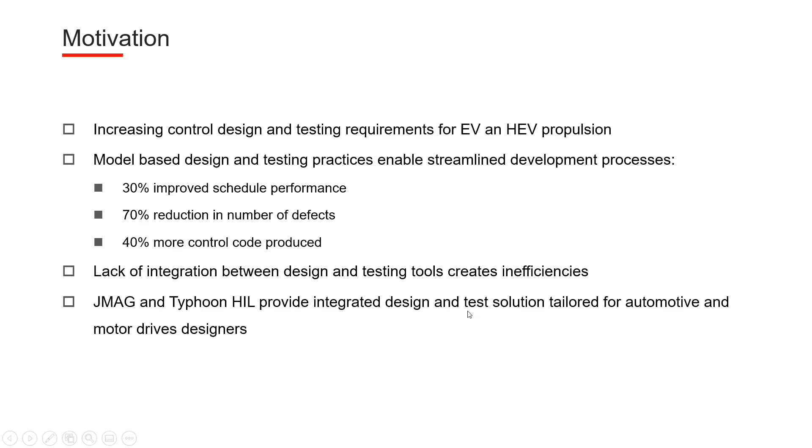Taking a little bit further and basically looking at the V cycle, which is the development cycle of EV motor drives, we can achieve reliable design right from the initial stages. So there are two phases, design and testing phase, wherein the combination test can be started as early as right after motor design. Basically, to be more specific, what we can do is we can test machine and control together at an early stage by integrating high fidelity models.

This way, what we can achieve is shorter and faster development cycles. So with this, what we are going to present today is a solution which is a better way to design and test motor drive control. What we are presenting here is a solution which involves JMAG and Typhoon HIL integration.

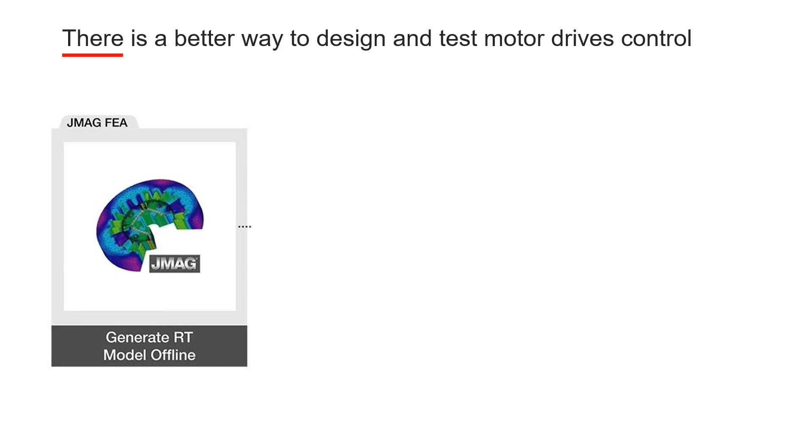So we are going to cover something about JMAG, how you create these high fidelity models, as you can see on my screen. Just to give you a framework, the screen shows how an FEM model can be converted to a lookup table based model, and then how we can integrate that with the Typhoon HIL solution to provide an integrated solution for achieving all the motivation points I have covered.

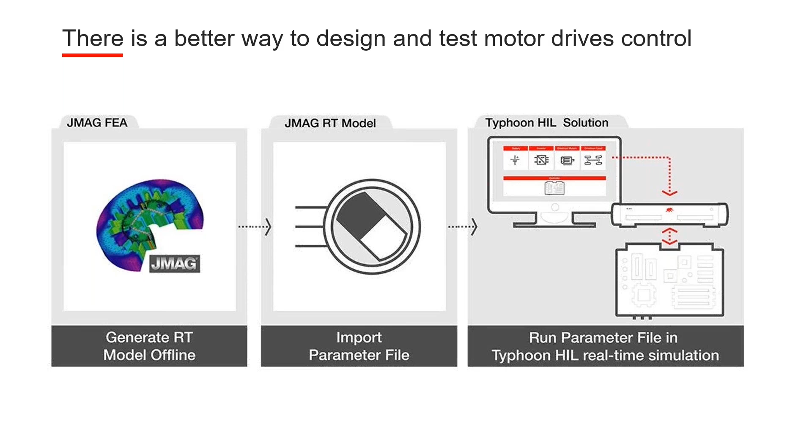All right, moving on to the next slide. Starting with JMAG-RT. We will give a brief introduction and set the pace for the next talk and also the demonstration. So we'll quickly look at what JMAG-RT is. JMAG-RT is basically a tool that generates high fidelity plant models for system level simulation and real-time simulation.

Now, when I say high fidelity model, it basically captures the comprehensive motor characteristics that can be extracted from an FEA model. To be more specific, we can take into account nonlinear effects, saturation effects, and space harmonics. JMAG-RT is used to develop this 1D model, which is basically a lookup table that can be used in hardware-in-the-loop simulations, which can connect a physical ECU to a virtual motor.

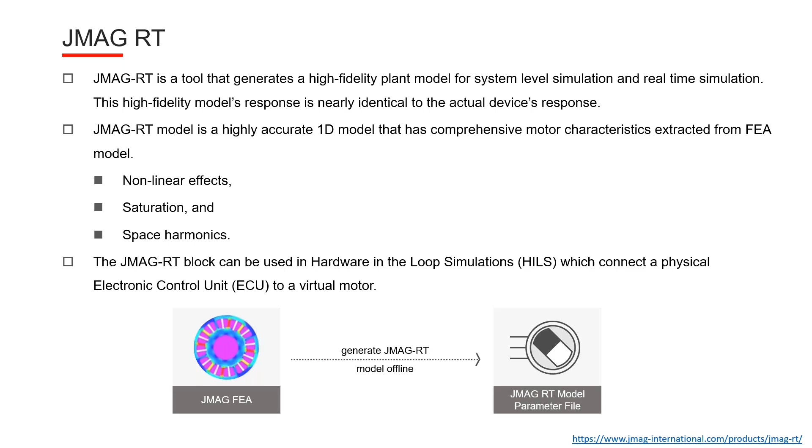Then you have JMAG Designer, which is a full-fledged electromagnetic FEA analysis tool from which you can generate a JMAG-RT model. If you have your test data or measurement data, you can also input a CSV file to develop this lookup table. And also on our website, we have commonly used motor models, called the motor model library. You can download it from there as well.

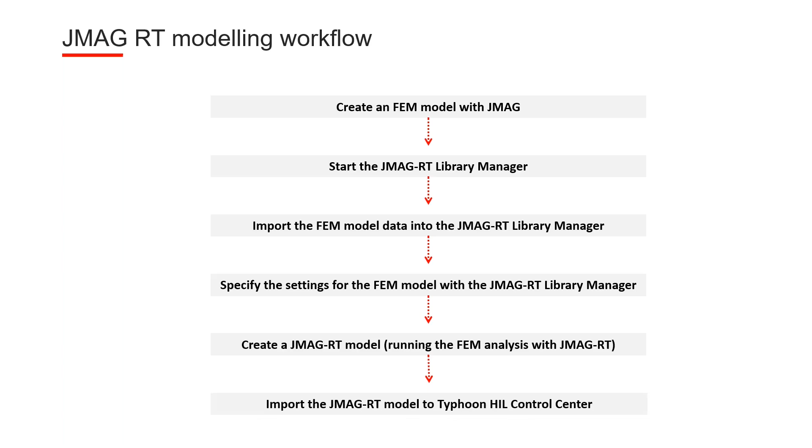Now, the JMAG-RT modeling workflow involves us first creating an FEM model with JMAG. In the second stage, we start the JMAG-RT library manager. Of course, I'm just talking about the workflow and the framework, but later we will also go over the demonstration. In the JMAG-RT library manager, we import the FEM model, and then we specify some of the settings that are required, basically current angle and current amplitude inputs. Once we run this RT model, it outputs an RTT file that can be transferred to Typhoon HIL Control Center.

Now, from here, I will pass it on to my friend Peter, and he will talk about what he's going to do with this RTT file, the high fidelity plant lookup table that I'm providing to Typhoon.

Okay, thank you. Let me just quickly share my screen. Just a second. Okay, Boris, please let me know if you see the slide now. Yep, everything is perfect. Okay, great, thank you.

So from here, what we want to enable for users is to seamlessly import the JMAG-RT generated models into Typhoon Hardware-in-the-Loop simulators. The idea is for the user just to take the RT file, load it into the model, and be done with it, without any further modifications to the RT file.

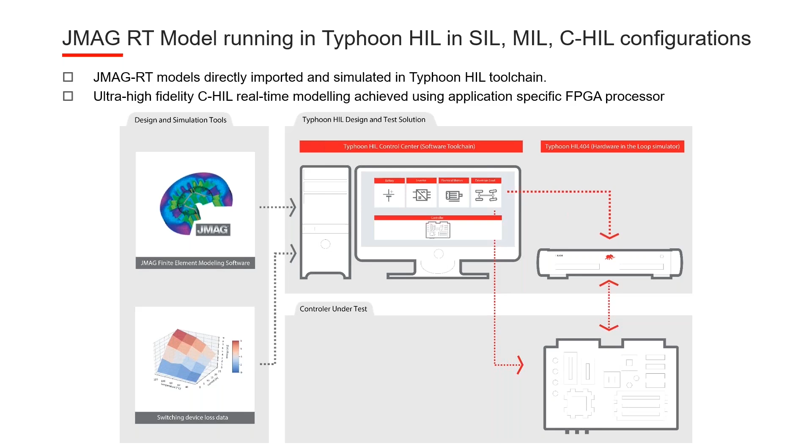And what's nice about this is that we can also run pre-made batches of tests every time we make a new change to the controller, and we can basically be safe when moving on to the real prototype. So any changes made can be tested right away on the simulator, and if we missed anything, we can go back to debugging and so on. And from the project schedule point of view, we can start testing the controller without the actual power stage prototype, and we can completely automate the testing process.

So I'll just quickly give an overview of the Typhoon HIL emulators. So basically they are built for power electronics drives and testing, and they use very application specific processors. It's been on the market for more than 10 years now, and it's continuously improved and expanded upon. So it really focuses on power electronics and power system applications.

The FPGA solver that solves the circuit can run with simulation time steps as low as 200 nanoseconds, which gives us a great resolution. And in addition to that, we also have sampling of digital inputs of 3.5 nanoseconds in order to support simulations of converters that work with high switching frequencies. The design of the simulators is modular, so the time step of the simulation is not a function of the model size. We can just connect new devices to the already existing system and increase the model size. And Typhoon also offers built-in test automation capabilities.

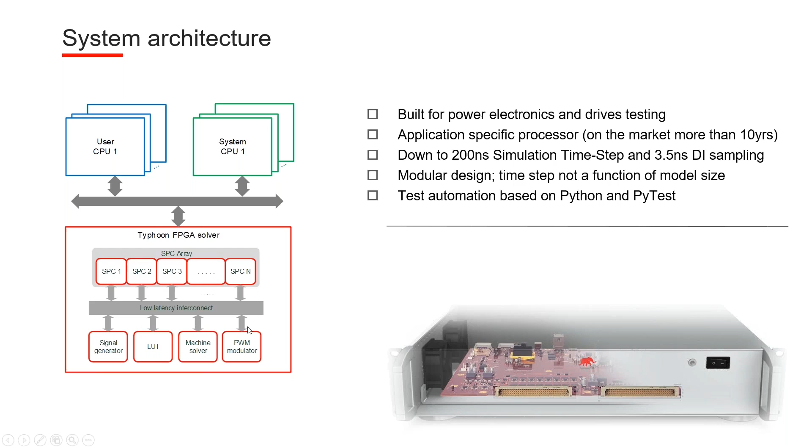And I'll spend a little bit more time talking about the machine solver, because we're doing a demo in motor drives. So basically, the machine solver is a part of the FPGA processor. It supports multiple machine types, and we'll see that in the Typhoon schematic editor library. We have support for the direct import of JMAG-RT models. The solver runs synchronously with the circuit model, meaning that all the machine models also run at the same very low time steps as the rest of the circuit.

And we have built-in position and speed feedbacks for the machine models that can be sent to the controller. So incremental encoder, sine encoder, resolver, and protocol-based interfaces. At the moment, the nonlinear models include only saturation of fluxes as functions of currents, but in the near future, we want to expand this and add support for spatially varying machine models.

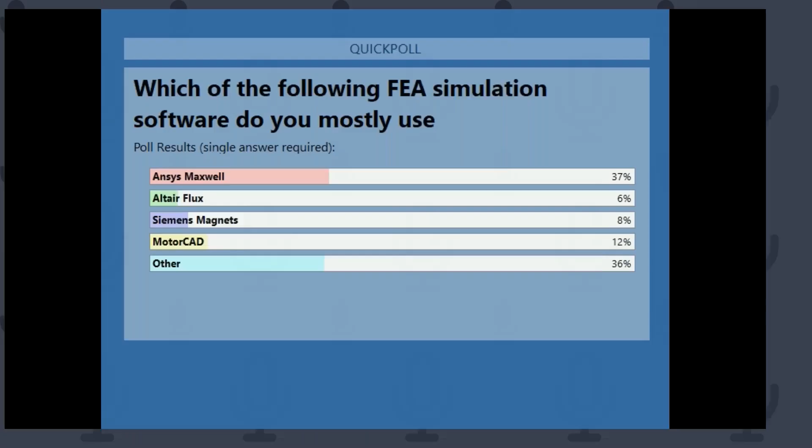Okay, so with that being said, these are the results of the poll. So we see a lot of people using ANSYS Maxwell. And I guess that's the perfect introduction to pass the talking stick over to Ved. So Ved, I'm gonna make you the presenter, and if you would like, you can take us into the demo sections.

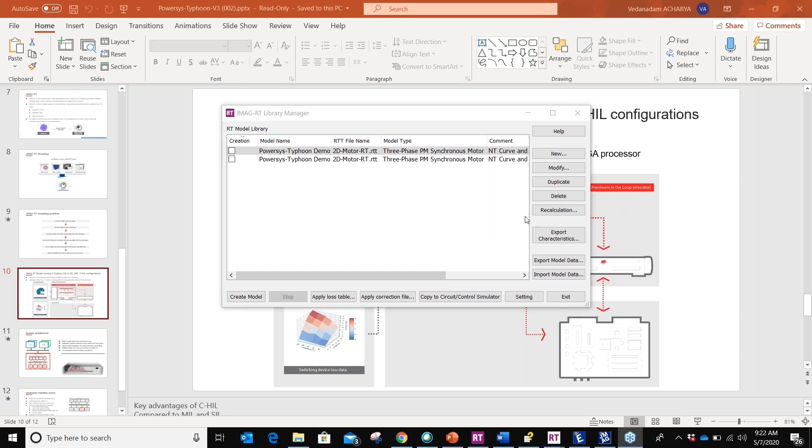All right, thank you, Boris. Let me share my screen again. All right, Boris, if you can confirm, you can see my screen? Yes, we can. Perfect. All right. Thank you, Boris, again, and thank you, Peter, for the presentation.

Now we are going to look at the demonstration of what we were actually setting up the framework for initially. So first thing, as we all know, is to look at JMAG-RT. How do we create this high fidelity lookup table? As we have seen some of the steps initially, we will just follow the same flow chart and try to generate an RTT file and pass it on to Peter, who will show us further how he will integrate that to Typhoon. So here we see the first and foremost thing is for us to create an FEM model.

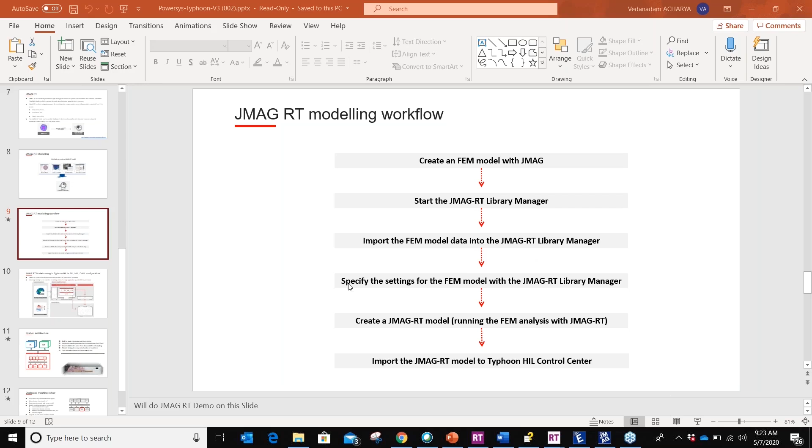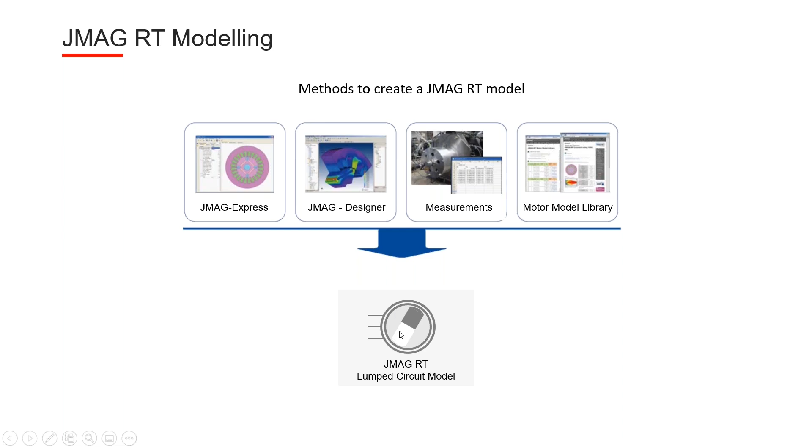So for that, as I said, there are 4 ways of doing it. Either you can do it by JMAG Express or JMAG Designer or measurements, or you can also download the model from Motor Model Library. So today we'll see the case where we are actually creating an FEM model in JMAG Designer and then we will create an RT file from there. So I will switch from my presentation to JMAG.

So first of all, quickly looking at the website, jmaginternational.com, if you go to technical library and application catalog, you do have a bunch of examples on there for any of your EM design or any of the motor models that can be downloaded. Provided you have a trial license, you can also download, open it on your end and test it for yourself.

And if you want to learn more about JMAG-RT as well, on our website under products, you can go and look at JMAG-RT. And it will also give you access to the motor model libraries where you can download and also look at different examples on there.

All right, so the first way of creating JMAG-RT, as I said, is using a template-based tool, which is JMAG Express. You can see there are a bunch of templates of different motor models. You can pick and choose any design from the commonly used templates on here, or you can also build a combination of your own rotor and stator model by picking from the most commonly used designs there. All right, this is one way.

And then once I pick any of the motor models, it will give me an opportunity to put in the parameters required, either by requirements, if I know my requirements, it could be rated power, rated torque, or speed and max current and things like that. Or if I know detailed dimensions, material data, winding, and drive conditions of the particular motor, I can also do that as well. And then once I have this, there is a tab where you can directly click to create the JMAG-RT model. This is one of the ways.

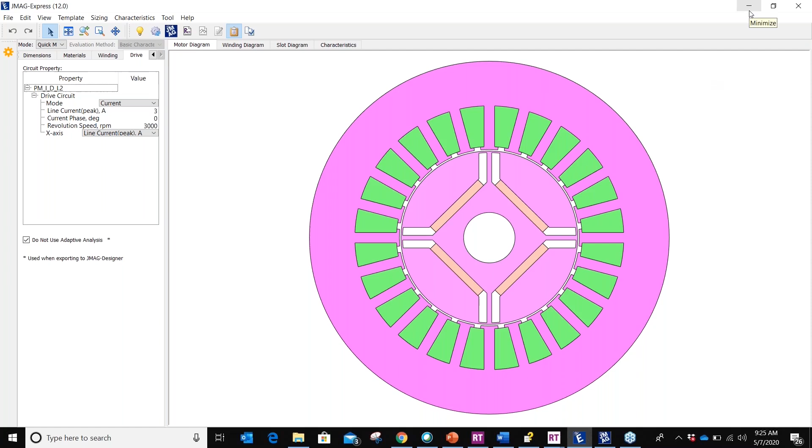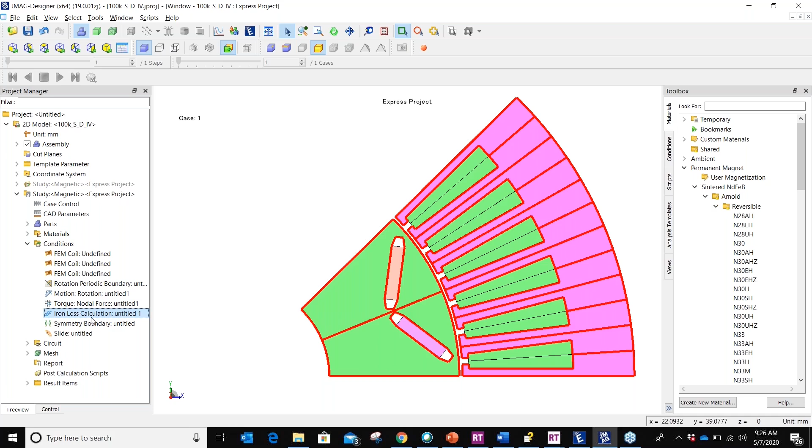So basically the first step is to create your FEA model, which you can do by Express. Or the other way we are going to look at today is by using JMAG Designer, which is a full-fledged FEA tool. Now, in this, as you can see, I have a 2D model here, and I have my study created with all the parameters set up. So I define my materials, I define my conditions. Under these conditions, I also have loss setting. Basically, I am trying to take iron losses into account as well while I create my RT file.

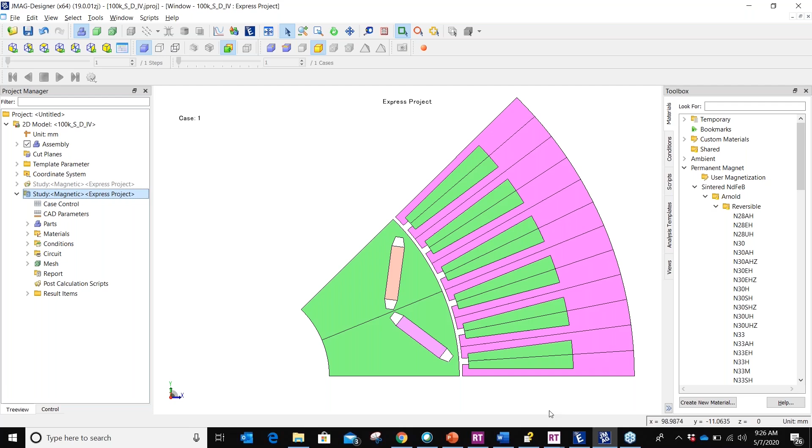That is the reason I also have the loss condition set up. And then I also mesh the model. Here we go, I can quickly show you the meshing. And then further, I need to input this into JMAG RT. So for that, I will go ahead and open RT library.

This is called the library manager, wherein I can quickly click on new, and I can input different types of machine models, either a PMSM or a stepper motor, solenoids, induction machines, or if you are working with multi-phase machines, you can also use a generic model as well. So as a demonstration for today, we are going to go over creating a three-phase PMSM.

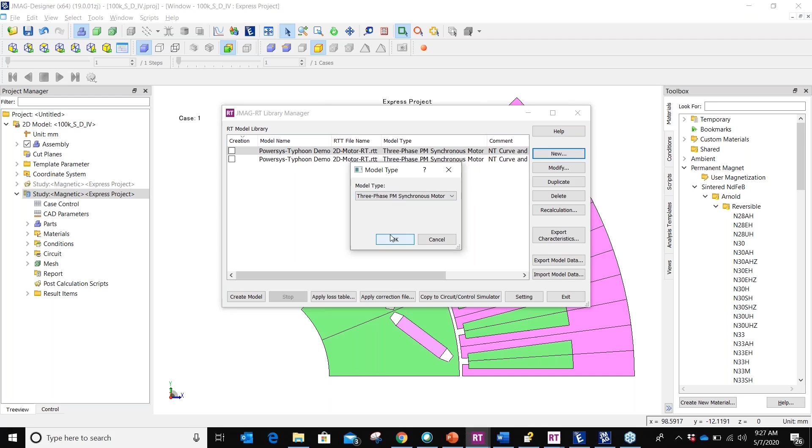Once I click OK, it will open up a window where I can select the fidelity that I want to be generating. So basically there are two types. One is an LdLq model and the other one is spatial harmonics. When I say LdLq model, the d and q axis inductances are dependent on current and phase angle, and the effects of slot harmonics are not accounted for due to the sinusoidal component of the EMF in this particular fidelity.

And the spatial harmonics model is a more accurate model because the inductances and torque are dependent on current and phase angle, and slot harmonics are accounted for, and the inductance can be obtained highly accurately even if the model has very high magnetic saturation, for example. So this can be done.

And the third option here, use user data, is basically when you have measurement data, you can input a CSV file of the measurement data here. I can show you an example of a CSV file and the data that can be imported for generating an RTT file from the measurement data.

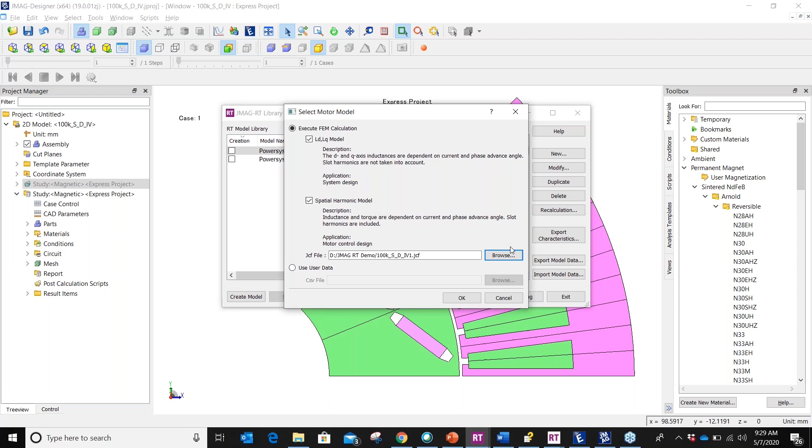All right, now for demonstration purposes, I can select both fidelities, and then I need to input my JCF file, which is the FEM model. I already saved a JCF file from the FEM model I created, so I will just input that and click OK. Once I click OK, it opens up a window where I can scroll through multiple tabs for the settings. Here I already have an example open, so I'll just walk you through that.

The first tab is the information tab. Basically, you can input basic information, and you can also look at the version, model type, and what kind of fidelity you have selected. Motor information, if you want to put a comment in there, and the resolution you're using to generate this RTT file. When you are transferring this RT file to your control designer, or anybody, you can pick and choose what data you want to publish or share. If your motor design parameters cannot be shared, you can just uncheck publish so that the data is safe on your end.

But in case you are willing to share the details, you can click on publish so that when the lookup table is created, you can also see the information of the motor in that file as well.

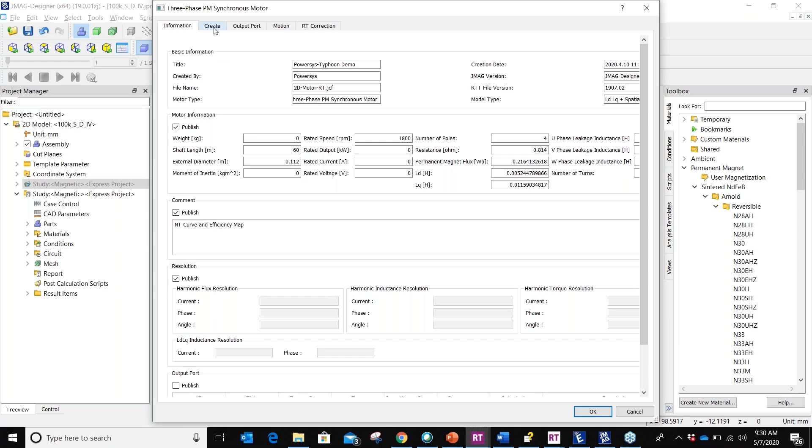Now, the most important tab is the create tab, where we define the resolution and different components to generate the RTT file. The first one shows me what kind of fidelity I've chosen, since I've chosen both LdLq and spatial harmonics. Here I can define the number of poles, and of course the configuration of the phases, UVW. Here I define the number of turns, which for this example is 35. The resistance I can define, this is the phase resistance, and of course the leakage inductance as well.

Now, moving on to the next one, where it says drive type or current harmonic. If it is driven by a sinusoidal wave, the option checked here is sine wave drive. Or if it is driven by other waveforms like square wave, you can check the other option. And here is where we define the settings for the current and phase angle. Basically, the number of operating points can be defined here.

Now, you can also use the auto setting. Basically, what auto setting does is it creates the data points that are set automatically. You can just enter the rated current, and once you enter the rated current, what JMAG does is it automatically creates 7 points, basically taking into account the rated current, and it will extend it to 3 times the rated current. Perfect.

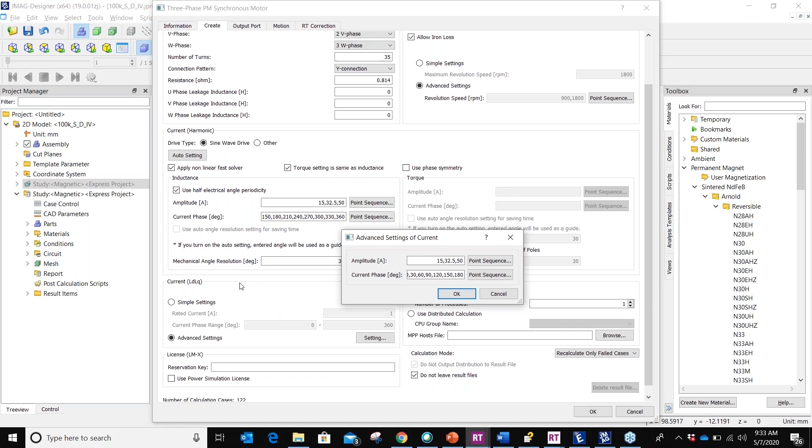In terms of Ld/Lq calculation, again, you can either go by simple settings, where you define your rated current, and JMAG automatically defines multiple points, or you can click on advanced settings and you can define your current and phase angle. Here, I kind of matched both the inductance calculation and the Ld/Lq calculation to have the same operating points. All right, and based on the operating points, mix and match, there is a number of cases that are defined. The number of calculations that will be run to generate the lookup table are shown here.

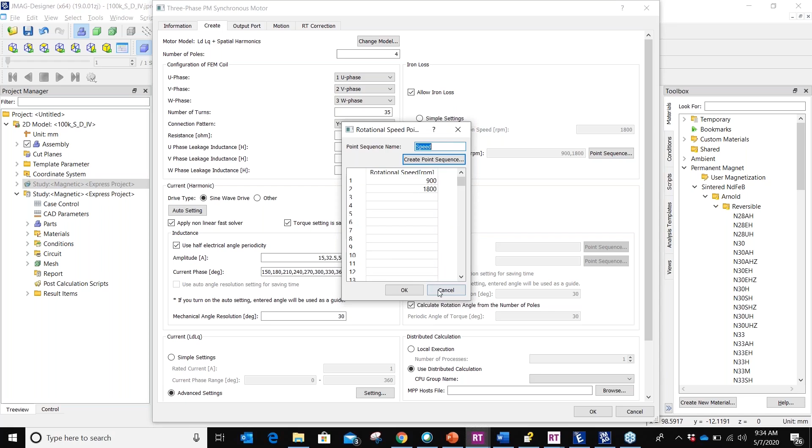Now, a couple of other things is if your model is taking into account the iron losses, you can always use this tab wherein you can define, hey, how do I want to calculate my iron losses? Again, simple settings. Or I want to choose a point sequence, I just use 2 speeds, and then further, since there are many calculations, you do have the options of basically parallelizing the calculations, provided you have the multi-core running capability. There are different licensing structures that you can use to basically move the simulation faster.

Okay, some of the other things is you can also define your mechanical angle resolution here. So by default it is set to 30, but obviously you will define it based on your model and based on the fineness of the resolution you would need. And when angle dependency for inductance in each phase has periodicity, in that case, you can use this half electric angle periodicity. Basically, what it does is the calculation time for generating the RT model will reduce if there is periodicity, and you can set the option to use periodicity.

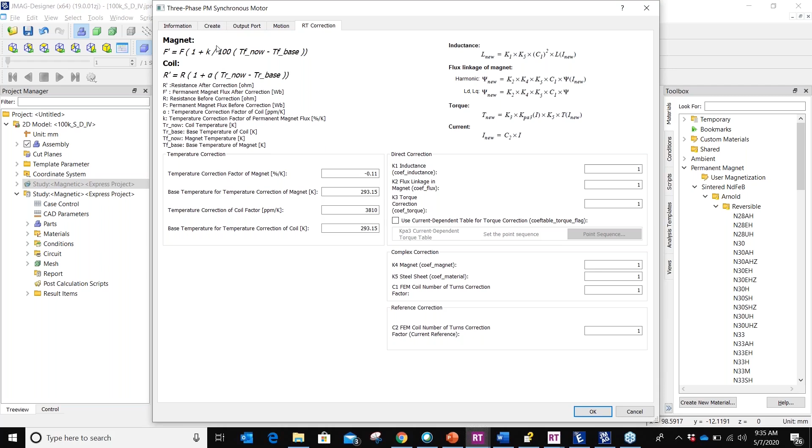All right, so these are some of the settings which we typically do, and then in case you want to introduce some correction factors, you can do it here. For this demonstration it's not that important, but there is an option to also include the correction factors as well. All right, once we do this, we just click OK, and then we check the model, and then we have an option to create model. So we can click on create model, and it starts to calculate and generate the RTT file for us.

So I already have generated that model. So I do have my RT file which I already created. So this is the RTT file. Now, how do I see what this RT file generates, or how do I verify if my expectation is correct? What if this RTT file is generating according to what I am expecting or what my inputs are? So I have something called JMAG-RT Viewer. This is the tool.

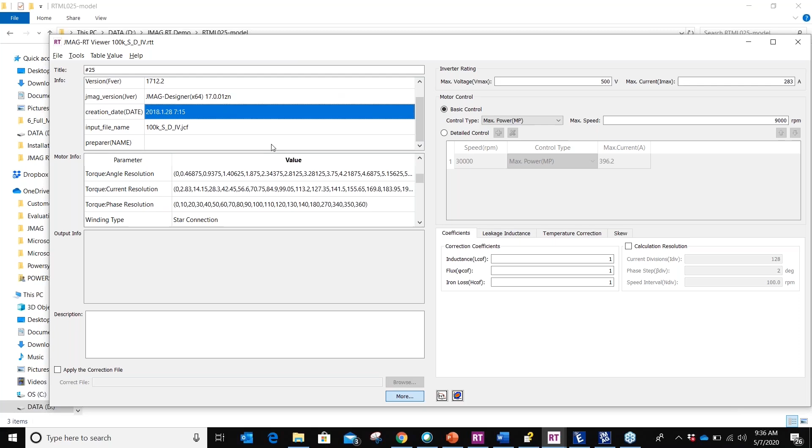So basically, I can go here and drag and drop, or I can just open the file which I just created, the RTT file. Once I open the file, the information which has been published while I was creating the RT is pretty much shown here. Whatever is the information I was able to share. So I have all my operating points or data and other information that I shared available for me here.

Now, once I click on more, it opens up this additional window, extends this window basically, where I can input my inverter ratings and quickly look at some of the basic control methodologies I can use and look at, hey, how is my efficiency map or speed torque curve looking?

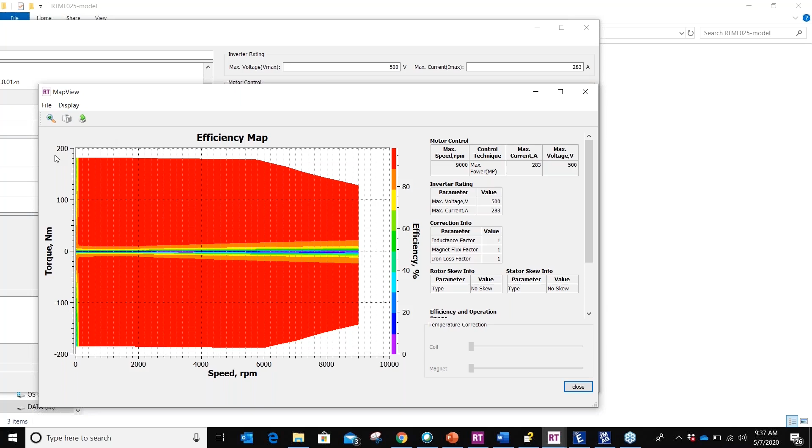Now, this is a little bit of an extension of what I wanted to talk about, but the idea here is once I create this lookup table, the RTT file, I just pass it on to Typhoon HIL. And at this point, I will pass it over to my colleague, Peter, who will show you how smoothly he can integrate this in the workflow on the Typhoon HIL bench, and then he will show you further how we can analyze using Typhoon. With that, over to Peter.

Okay, Ved, thank you very much. Let me just continue from here. So, Boris, please let me know. Do you see the Typhoon main window? Yep, seeing everything. Okay, good. So

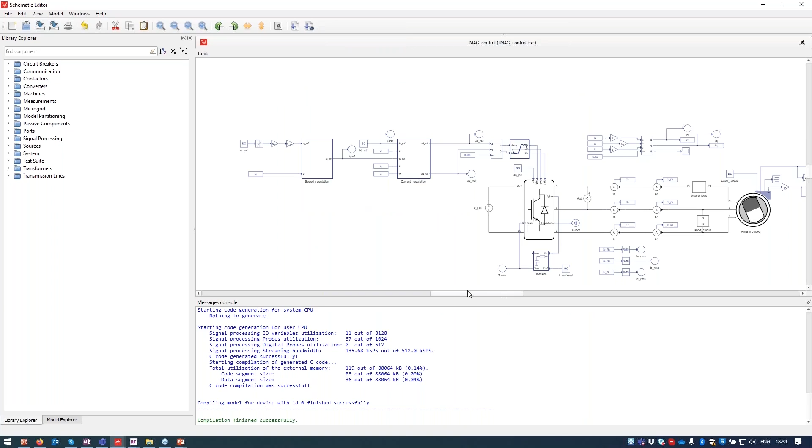Today I'm just going to show a short demo of a permanent magnet synchronous machine motor drive in Typhoon HIL. And for that, we're going to be using these first two tools, the schematic editor and the HIL SCADA. So I'll open the schematic editor, and I have the model that I'm going to simulate already prepared. I'll just go quickly through to give you an overview of how this works and what it looks like.

So here on the left, we have a library of components that we can drag and drop, and then connect together to form a system that we want to simulate. So for example, for a motor drive with the JMAG machine, I want to have an inverter connected to a machine, and on this DC link side, maybe I'll have a battery or a source or anything.

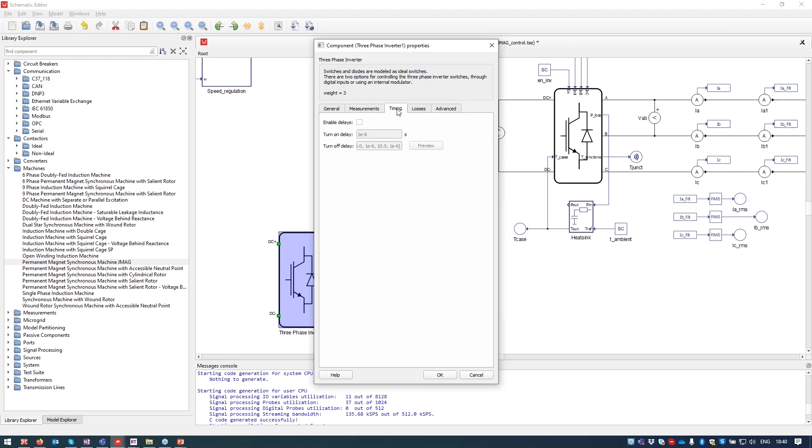By double clicking on the components, you can set the properties. For example, for the inverters, you can designate which digital input pins are going to control which of the switches. You can import losses, you can enable turn on and turn off delays and similar. For basically all of the other components, it's a similar story.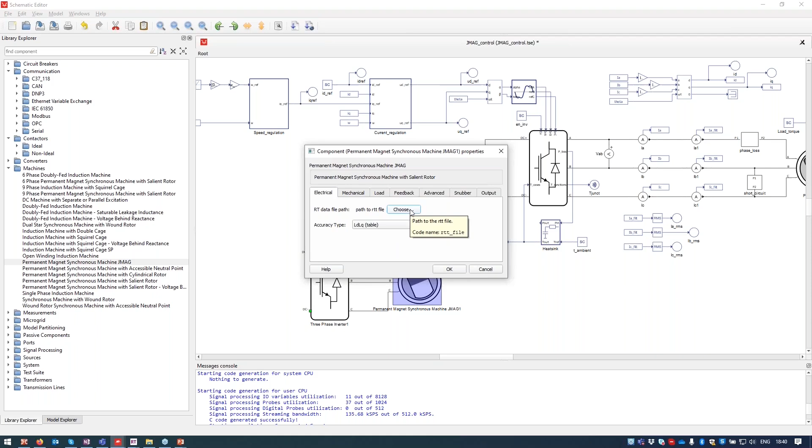So for example, the permanent magnet synchronous machine that imports the JMAG-RT files basically expects an RTT file. You just provide the component a path to the RTT file that you want to simulate, and that's it. So then once you've made your system, you can just compile and simulate it.

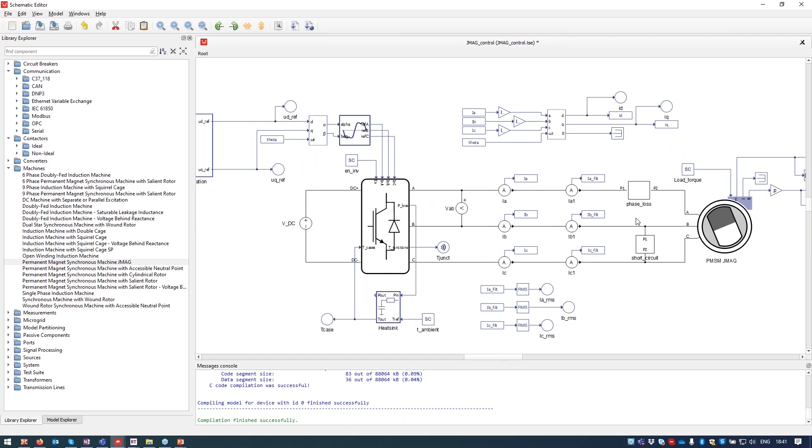So for today, I'll just quickly go through the specifics of what we have prepared. It's a simple motor drive. We have a fixed voltage source in the DC link, a 2-level inverter, and a PMSM. In addition to that, we have these two blocks that are going to be used to simulate faults. One contactor is going to be used to simulate phase A loss, and the other one is going to simulate a short circuit between phases B and C at the motor terminals across a small impedance.

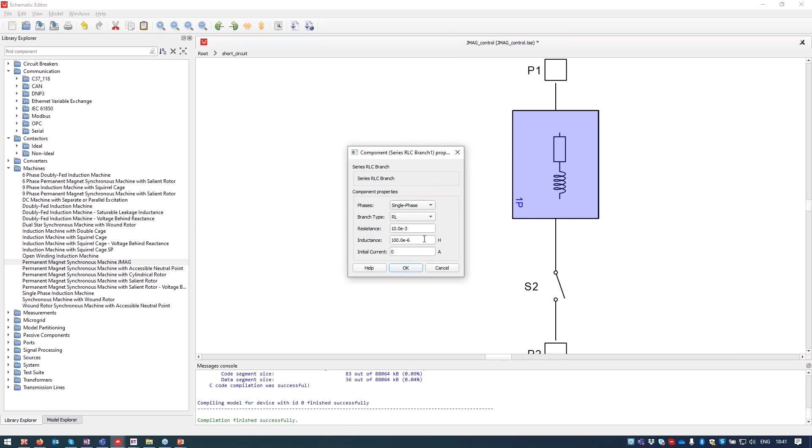What you see here, the components in black, are basically simulated on the FPGA. So that is our power stage: the voltage source, the inverter, the machine, the measurements and the contactors here that simulate the faults.

The inverter is switching at 10 kilohertz switching frequency, and the control signals, because I'm not using a real controller, actually come from the signal processing parts of the library. And the actual PWM generator is one FPGA module inside the HIL device that generates my PWM signals.

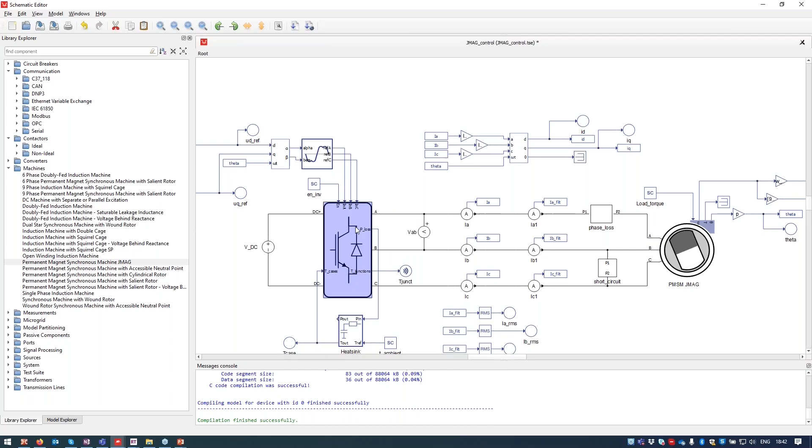In addition to this, I have the real-time calculation of switching and conduction losses and some thermal properties of the switching modules enabled to simulate. These properties of the switches are imported through XML files that contain all the relevant data, so the thermal characteristics and the loss characteristics of the switches and the diodes. And these files are typically available on semiconductor manufacturer websites.

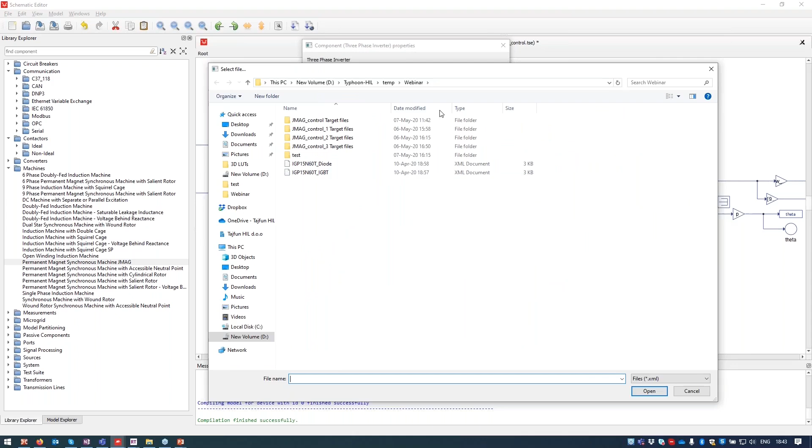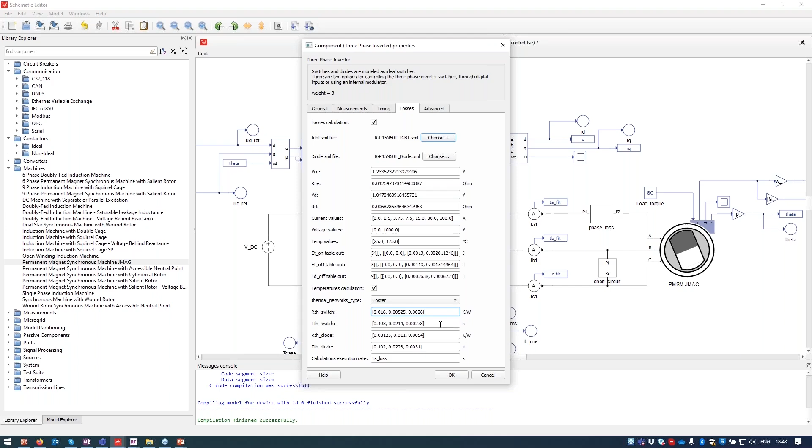So in case you have a specific switch and you have its design data given in an XML format, you can just import it into Typhoon. And I have two of these prepared. Once you've imported them, you will have these properties below filled, and you can do some modifications if necessary. Similarly, the thermal properties of the switches are simulated with these characteristics. And then on the outside,